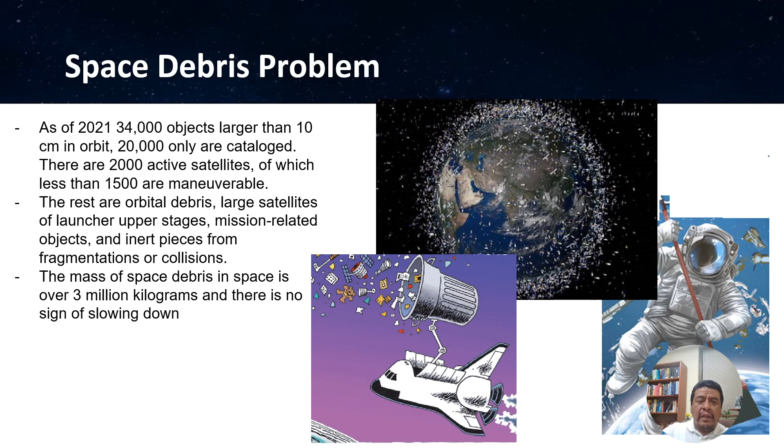Besides, the mass of space debris in space is over 3 million kilograms, and there is no sign of slowing down. This problem might produce collisions at hypervelocities. Therefore, there is a need for objects to be identified, captured, towed to a different orbit, to be reactivated or repaired if possible.

Here I introduce two examples of satellites that burned through all their fuel. After 9 years in deep space collecting data, which indicated that our sky is filled with billions of hidden planets, more planets even than stars, NASA's Kepler Space Telescope ran out of fuel. The fuel was needed to continue further mission operations. Therefore, NASA decided to retire the spacecraft within its current safe orbit, away from Earth.

In this case, it would have been very useful to be able to refuel the spacecraft and prolong its life, but with the current technology that was not possible. Besides, after 11 years of operation in space, in 2018, NASA decided to retire the Dawn spacecraft for a similar reason.

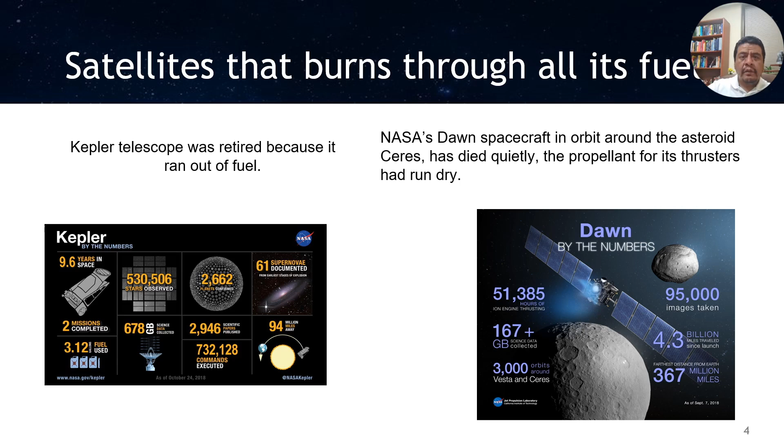Presumably, the thrusters ran out of fuel, which prevented the spacecraft from establishing contact with Earth, as the antennas couldn't be oriented towards the Earth, and the power generating solar panels couldn't be oriented towards the sun. These are two examples that show the need of on-orbit servicing, on-orbit repair, on-orbit refueling. In order to reduce the amount of space debris, some of the malfunctioning or retired spacecraft should be captured to repair them or refuel them.

For this purpose, different techniques have been proposed. For instance, the use of mechanisms with tentacles inspired by octopus and spiders. But one of the most promising technologies includes the use of robotic arms to capture the pieces of space debris - that means a robotic arm mounted on a base satellite. In this regard, different missions have been proposed to achieve the goal of capturing a malfunctioning object in orbit, such as the Orbital Express mission and the DEOS mission.

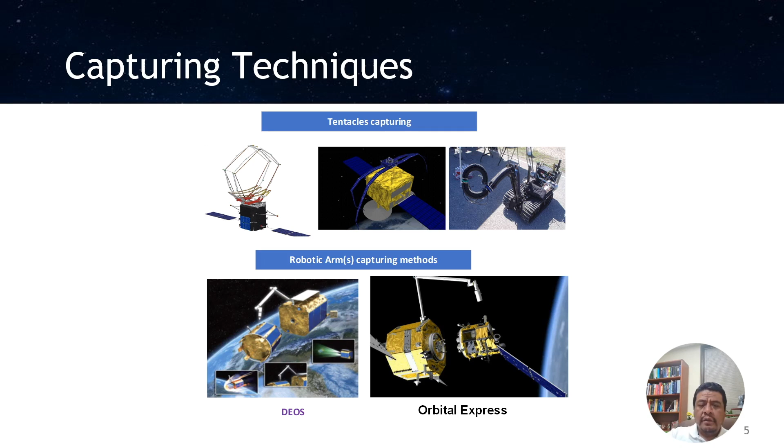The second phase is a final approaching phase, where some areas of interest include soft capturing, the minimization of the disturbances on the base spacecraft due to the robotic arm motion, some safety considerations, and of course robotic path planning and collision avoidance.

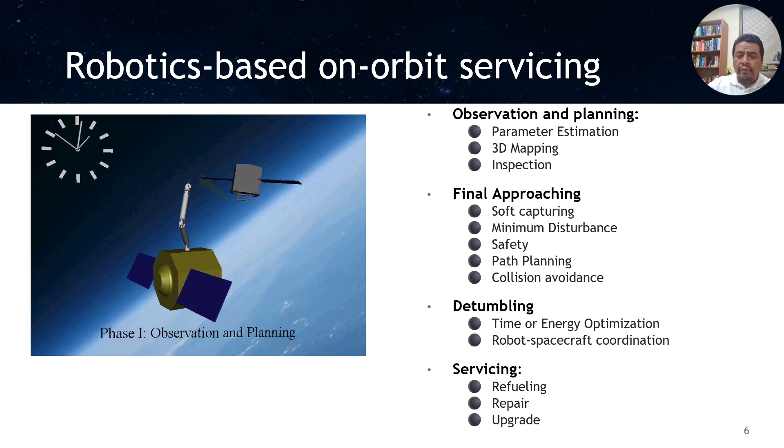Here I'm going to introduce an augmented reality-based robotic system to support in-space servicing. Augmented reality can provide the human operator with a 3D dynamical view of the target spacecraft to select the best perspective and view of the region of interest, so that the repair path can be planned appropriately despite the presence of occluded zones.

Occlusion in space may occur due to the presence of an object on top of a region of interest that prevents the robot from having a good view of the area to repair.

Another source can be the amount of light. The robot can be operating in shadow or can be operated in direct light, complicating the path planning of the repair task. Therefore, having a 3D dynamical view of the target based on an augmented reality system can help perform the operation despite the occlusion.

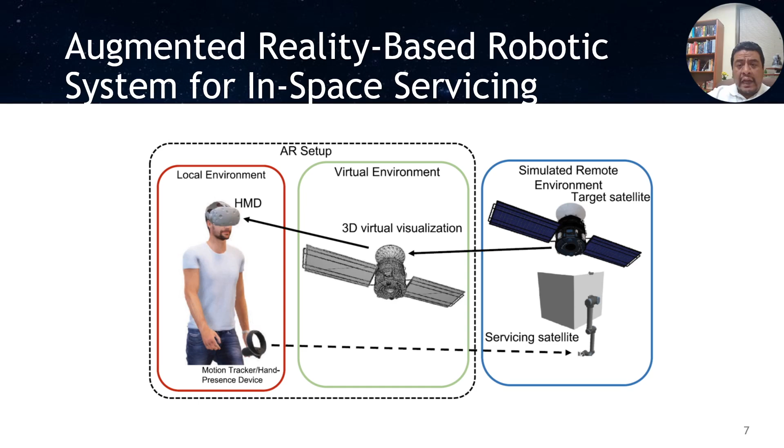There is a virtual environment or 3D virtual representation of the real space asset, and a simulated remote environment or target satellite in orbit. In a realistic case, the simulated remote environment will be the actual real environment in orbit.

This slide shows with more detail the simulated remote environment, which includes the servicing robot that features a base spacecraft and a 6 degrees of freedom robotic arm, which will perform a repair task of a solar panel.

A solar panel might be damaged during launch due to the high vibration loads or due to electric discharges in orbit, for instance. So in this example, the robot should deposit a conductive ink to repair probably an open circuit or so.

In the augmented local environment, we have the human operator and we have the spacecraft simulated system. The human operator will use the virtual model to recreate the trajectory that the robot should follow for the repair task.

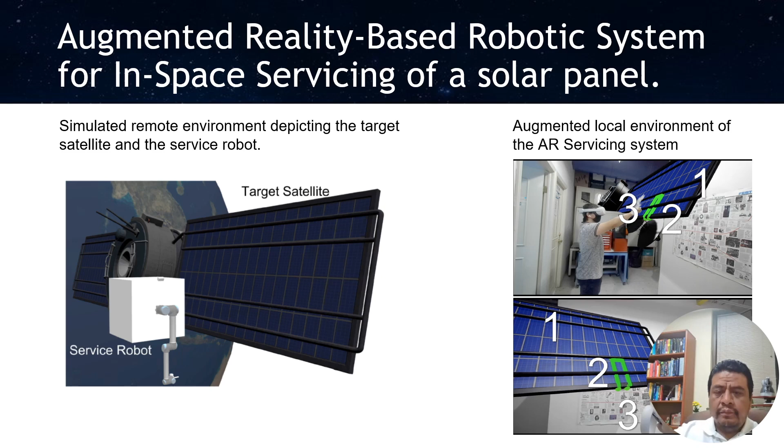As we can see in the figure, in this scenario, the trajectory to repair should be on both sides of the solar panel. It will be difficult for the robot to perform the trajectory on the occluded back plane without the guidance of the human indicating the trajectory to repair.

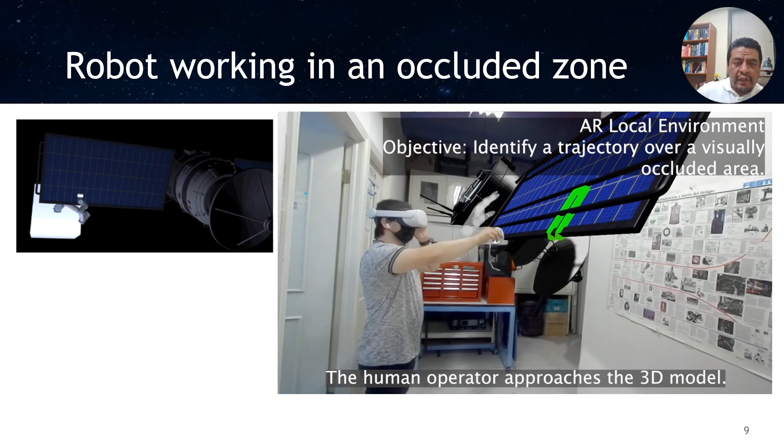As we can see here in this figure, the robot has to perform the repair task in an area that is not only difficult to reach but difficult to see. I'm gonna play the video that explains how this maneuver is performed.

In-space manufacturing and assembly also has potential to reduce space debris. For example, we can manufacture tools and components in orbit to repair and replace parts.

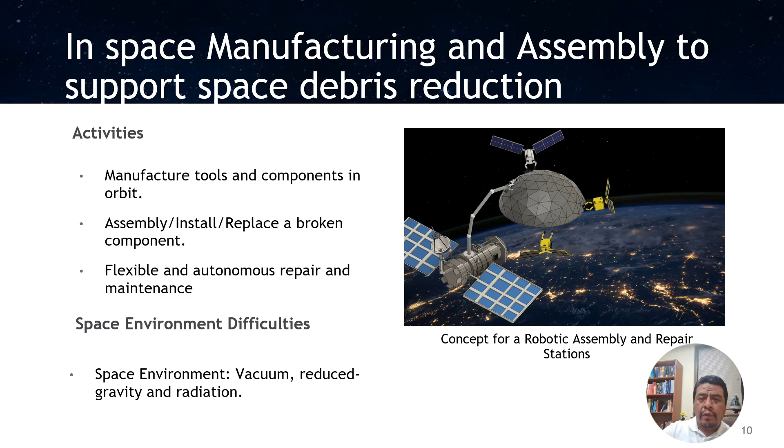A project related to in-space manufacturing and assembly we are working on is related to space welding. However, before performing the welding process, we first need to perform the joint fit up of two components, in this case, two triangular parts as an example.

So we have a system with a 6 degrees of freedom robotic arm and a 2 degrees of freedom free flyer small robot. They both have to coordinate to perform the joint fit up of these two components.

The system includes a set of cameras to monitor the process and make sure that we achieve the required precision and process control. In this case, we have to make sure that the gap and mismatch of the two components are according to the requirements.

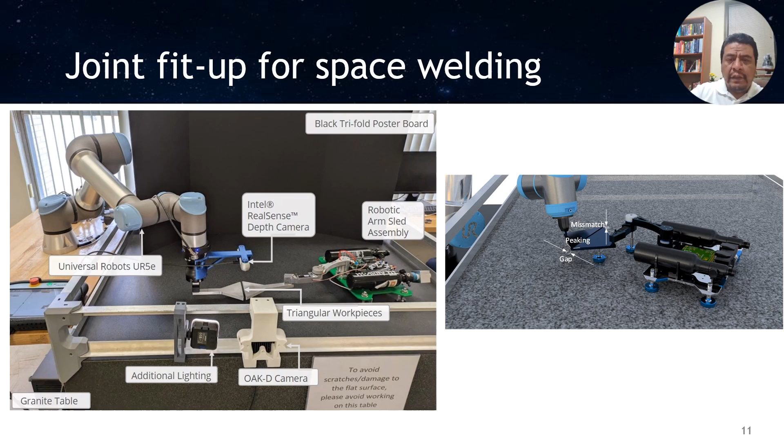Here I'm going to show a video that illustrates how the two robots move to perform the joint fit up of these two triangular parts, and we will be able to see also the response of the vision system to ensure process control.

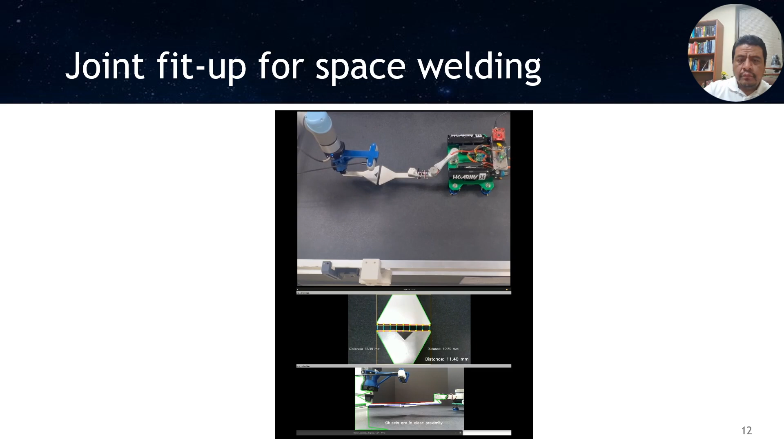This is a project on the use of robots to perform additive manufacturing in a space-like environment. The focus of this one is to perform 3D printing in vacuum and to analyze the process.

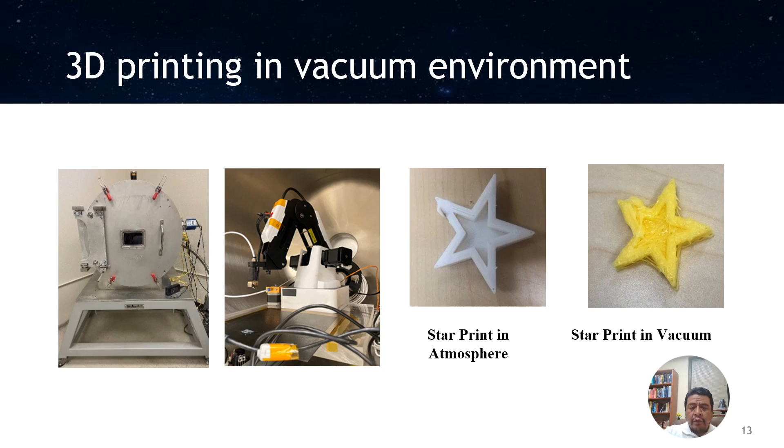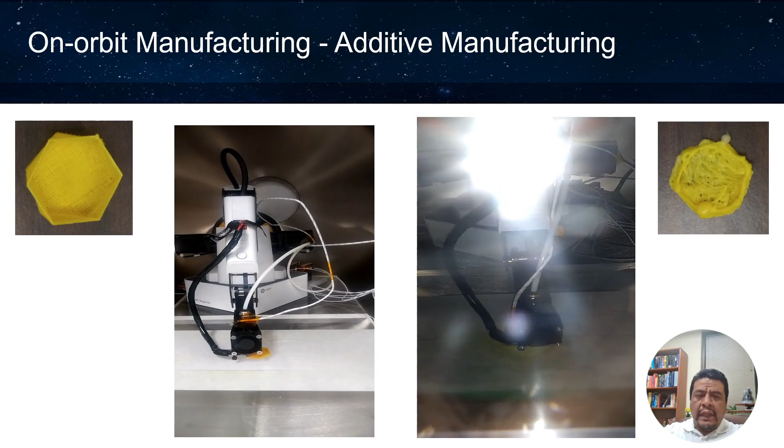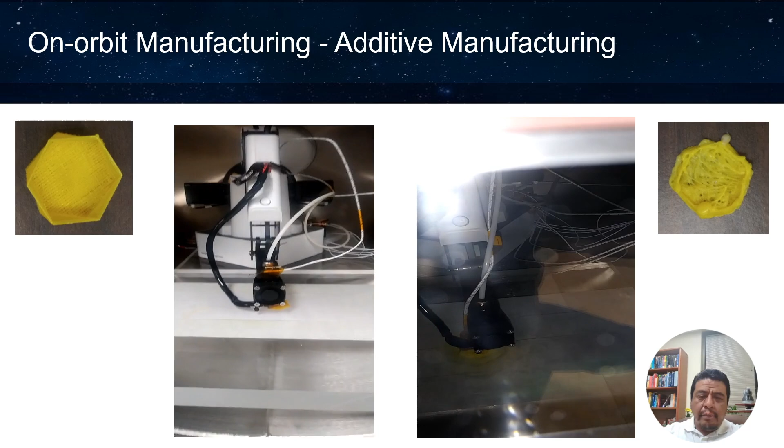This slide shows the video of the robots performing the 3D printing of the two same parts in regular atmosphere on the left and in vacuum on the right.

As we can see, the part being printed in the vacuum environment exhibits some defects due to the lack of convection in vacuum and due to the outgassing. That's why we can observe some bubbles on the part.

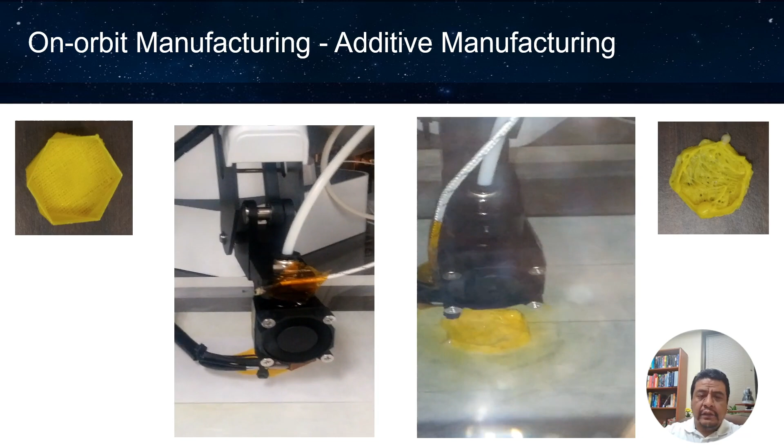Therefore, new processes and new materials need to be developed to support additive manufacturing in a space environment.

The motion will be recorded via encoder measurements and also a camera. This is a technology demonstration mission to further advance algorithms that in the future will be used in other robotic missions to support ISAM activities in space—servicing, assembly, and manufacturing—including, for instance, on-orbit servicing and on-orbit assembly.

The satellite includes different components such as a communication system using UHF and S-band antennas, an ADCS for attitude determination and control, an onboard computer, an electric power system, and an electric generation system through the solar panels.